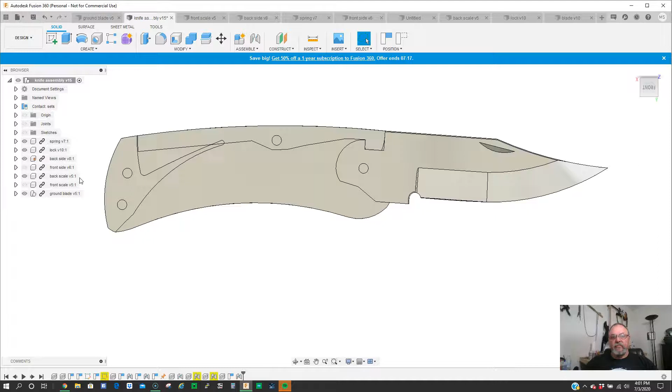Hey everybody, I wanted to drop in and show you what I've been working on in Fusion 360. This is a little folder knife that I've been working with that kind of motivated me to do some training videos on Fusion 360 and how you can use it in knife making.

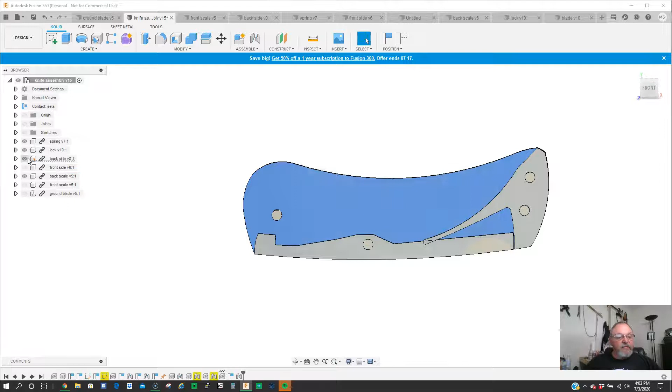So this is a Lockback folder. One of the nice things about Fusion 360 is you can identify all the different parts. You can turn them off, front scale, front side. Then we can see we've got the little lock mechanism. This is the spring, this is going to be the beveled blade, and this is going to be the back piece, the back frame. We can turn the blade off, turn the lock and the spring off, and just see the frame with the pins in it, and we can turn those things back on.

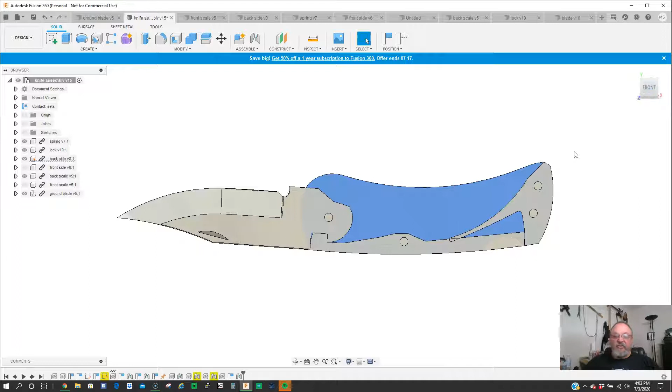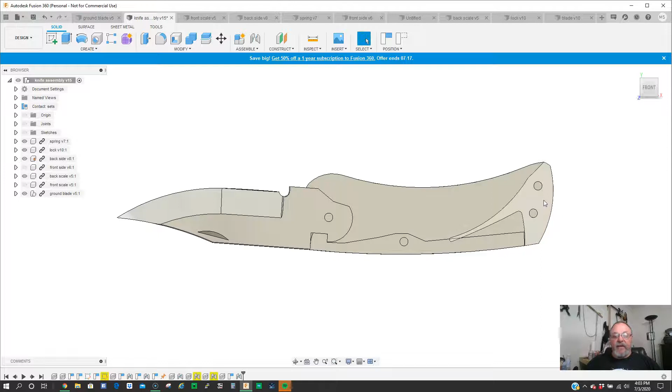Fusion 360 lets you create something called joints, and these joints are places where these pieces tie together. So the back side is grounded, in other words it doesn't move. It allows you movable joints, it allows you to move them. Like I can move this lock bar and I can move the blade. The spring is a fixed joint, so it doesn't rotate or move. Once it's in place, it's in place.

Now I can't really simulate the physics of the spring in Fusion 360. But what I've done is I've limited the motion of this locking mechanism to just a few degrees, and I'm telling it that I want it to rest in this position. So if I push it somewhere, it's always going to push back to that position.

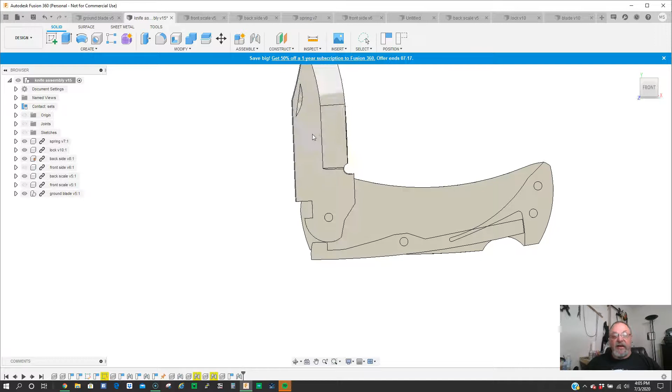Another thing that I've done is I enabled some contact sets. So one set is the blade and the lock, and another set is the blade and the spring. So the blade is on a circular joint, and the lock is on a circular joint, and they can't overlap because of the contact sets. So if I push on this, even though the physics wouldn't really let me do this, if I push this blade, it'll pop that lock out. As I rotate this around, I can see what's going to happen with the blade, with the lock. And I've created this because they keep pushing apart due to that contact set.

I've also created another contact set between the blade and the spring. So if I try to push this blade down too far, it'll hit that spring and I can't go any further. You get this.

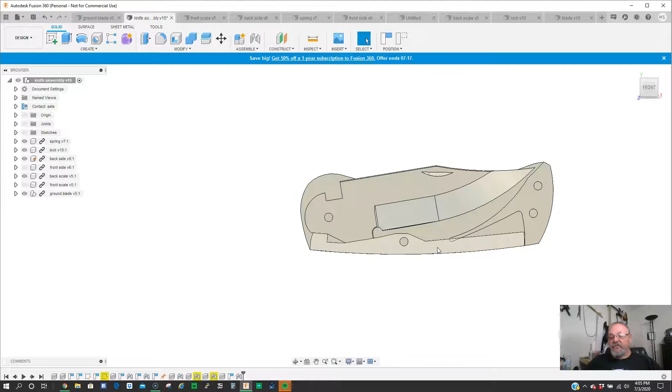Now, because the lock is at a resting position, or wants to go to that resting position, if I put this blade in a point where the tab here is going to push up on this, and it would normally push it closed, it'll push it closed. It's basically mimicking this spring, but it's not doing it directly, it's using those settings to affect the lock bar. Same thing over here, when I get close, it wants to return to that resting position. So if it's got any interaction in that notch at all to where it can settle, when I release it, it'll settle because the lock is trying to go back.

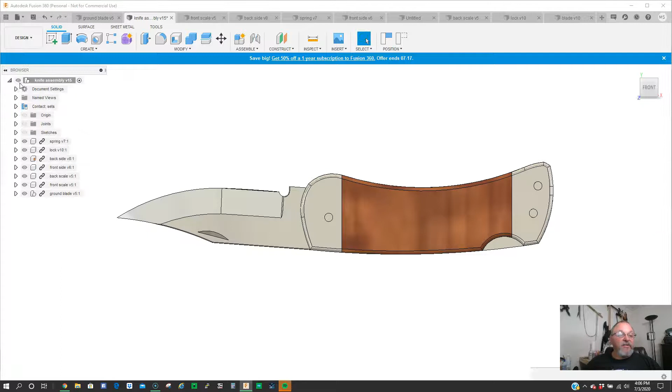Some other features, I can turn those front side scales and the side back on. I can also go up here and go into render. These are basically mirrored materials that I've used for the knife body parts. So when I rotate this, I can get a good look at what this is going to look like.

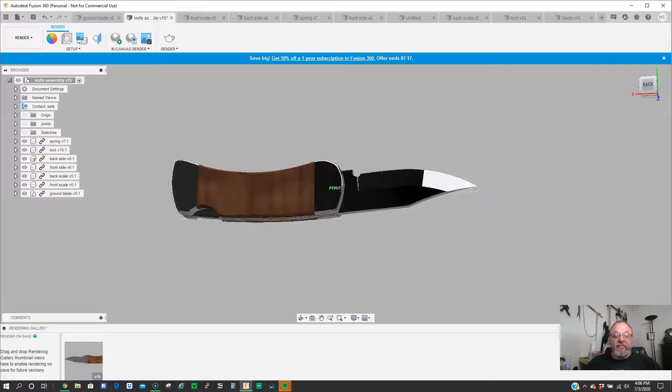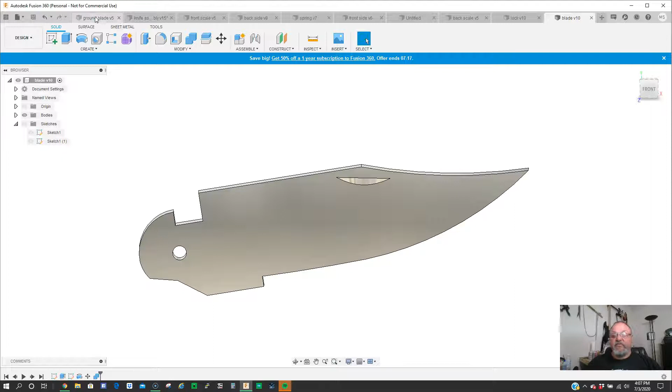And then the other nice thing about this is I can take all of these individual parts - front scale, the back side, the spring, front side. It's the back scale, that's the lock. This is the blade before the bevels was put on it. This is the ground blade.

The 3D tools to do this start getting a little tricky. Those are going to be a little bit on the advanced side, but something we can definitely eventually cover.

But I can take these - I have a lot of options here. I can create a drawing and print this out and have a paper drawing of the individual parts, so that I can then transfer them and make them. What I'm probably actually going to do is I may try 3D printing these, and I may try laser cutting them out of acrylic or something like that, to see if I can get the spring in a way to where it actually sort of functions, and just see what this feels like.

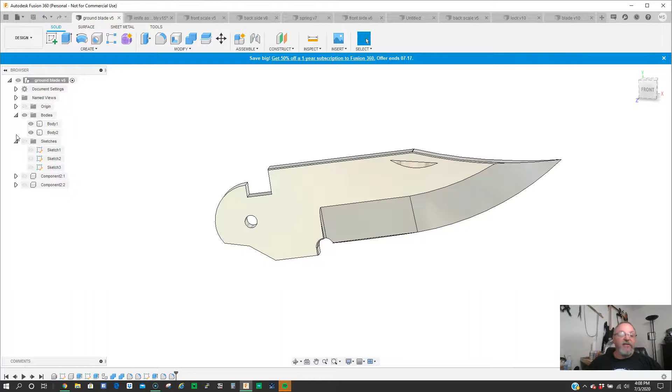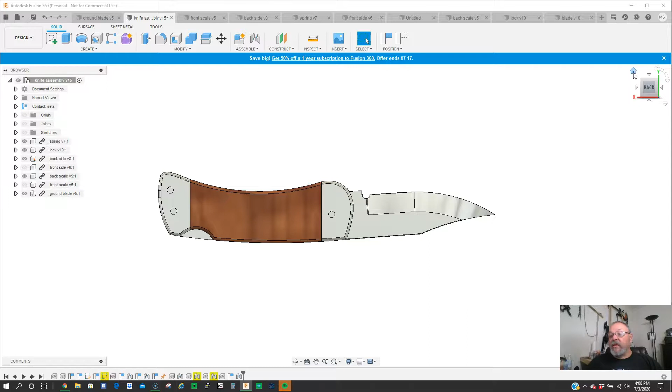And then the great thing about using Fusion 360, I can go back into this design and start looking at some of the things I want to change. I'm not real happy... not real happy with this extra area up here.

So I really don't need it here. It does give me a little bit of an area to hold my hand, kind of a finger choil idea, but it's a little too high there, and it's higher than it needs to be there. I need to hide that notch, but I could easily take 1/8 of an inch off of this, maybe a little hump, and then come down a little more. And it makes it fairly easy to do that.

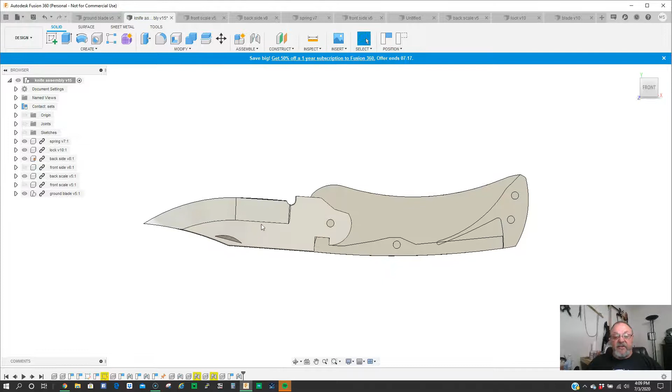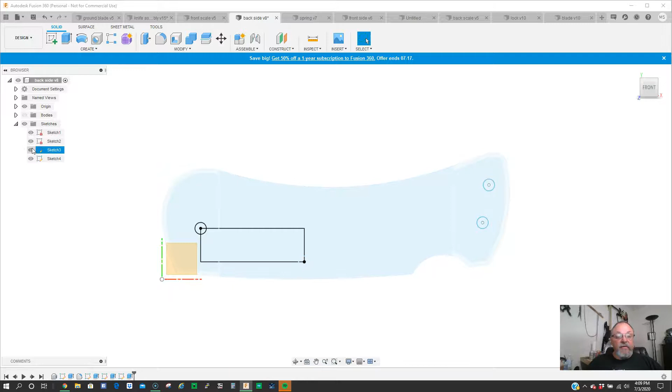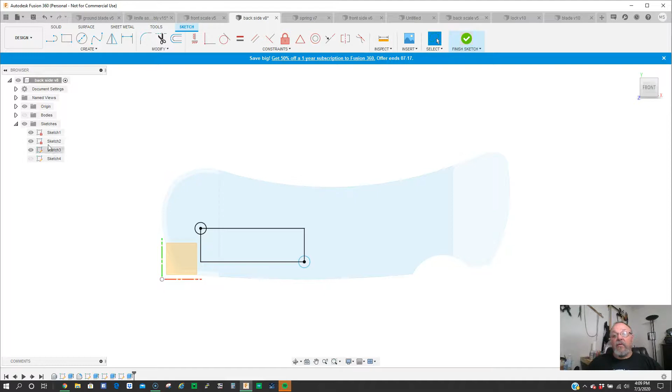I can identify what I want to change, and then go back to these side pieces and modify, basically go back to the sketch on that. Anyway, I can go back to the sketch and modify this contour if I don't want that material.

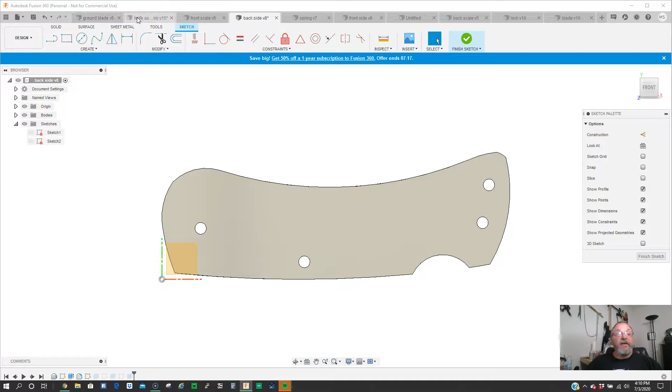And once I do that, I can go right back in, I can save it up here. I can go back into my assembly, and it'll give me a little indicator up here that one of my parts is out of date. I'll just update it, and it will bring that new change into the design.

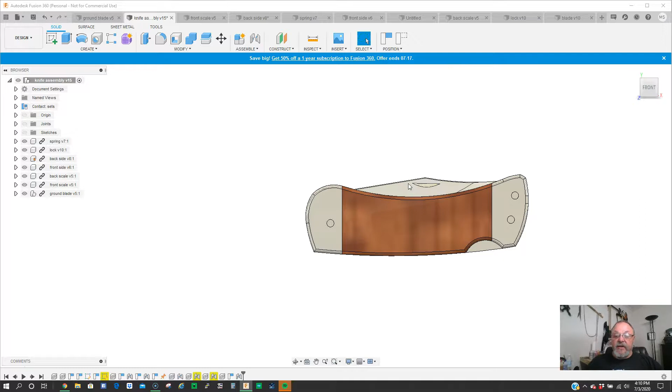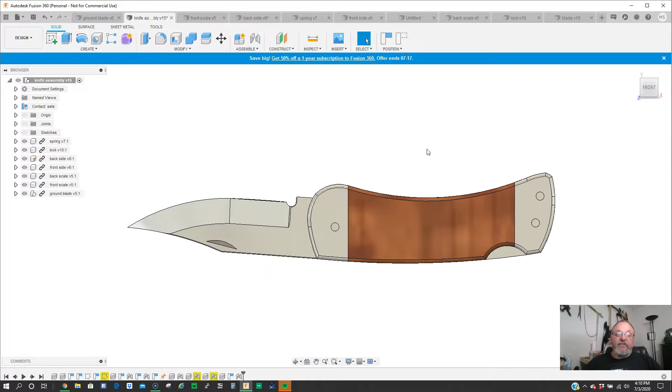Yeah, this is a great tool. Even if you just want to use it to make your designs and print them out, you can design around things like the diameter of wheels you have on your grinder. You can design your knives around the tools you have so that you can be more efficient in how you make those knives, as well as push yourself and kind of see what small steps you can take to make some big jumps in what you're doing.